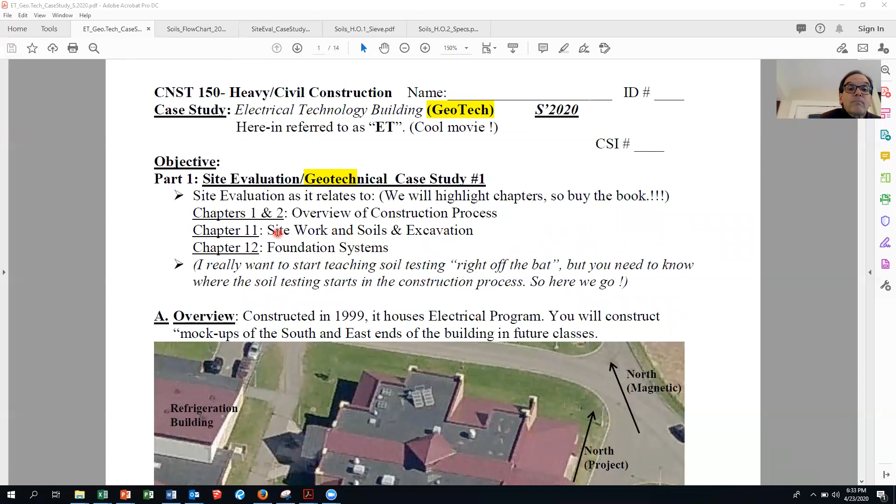And again, if you just joined us, go to Vanco Hall and go to Heavy Civil, go to the Soils Info folder, and go to ET Geotech case study. And the Mehta book, the textbook, does a nice job in chapters 11 and 12 on site work and soils and excavation, because that's what we're talking about.

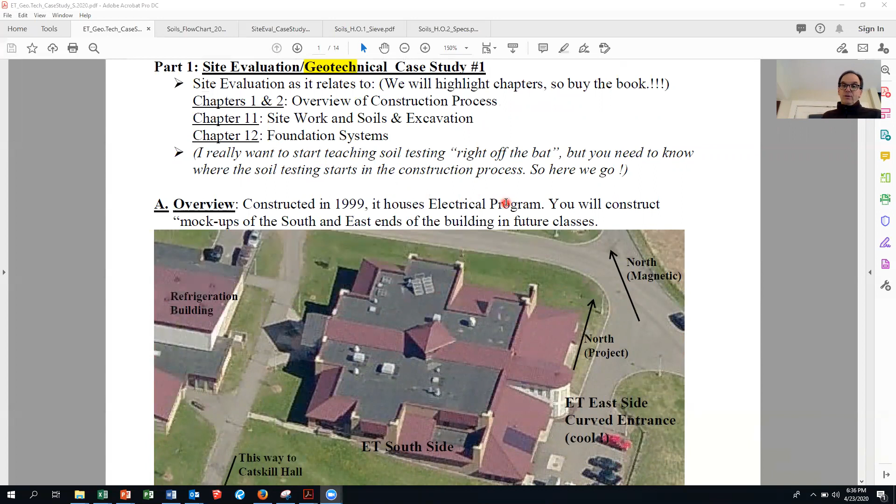There's the ET. And so usually I always like to start teaching soil testing right off the bat, but we've got to go through a little bit of background information as to where the soil testing starts in the process. And they talk a little bit about that in chapters 1 and 2. We'll talk about the pages that you want to look at there. There's ET. Everybody knows it. You've built it. It's a pretty cool building.

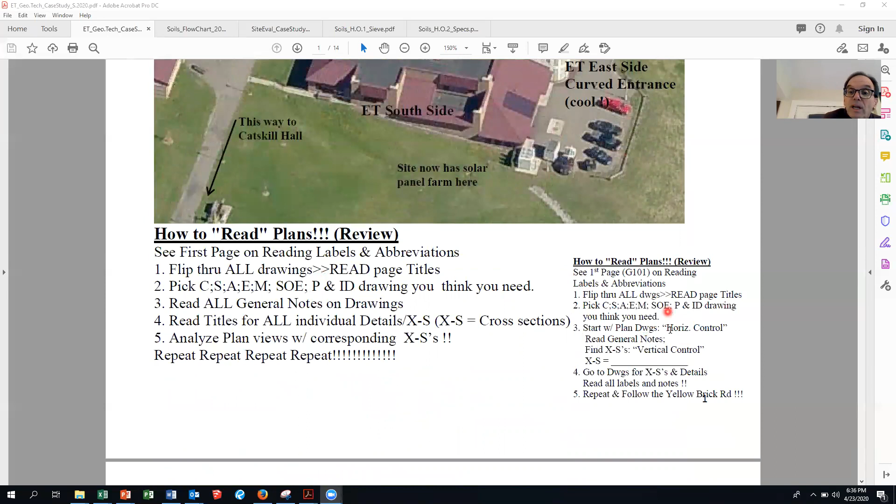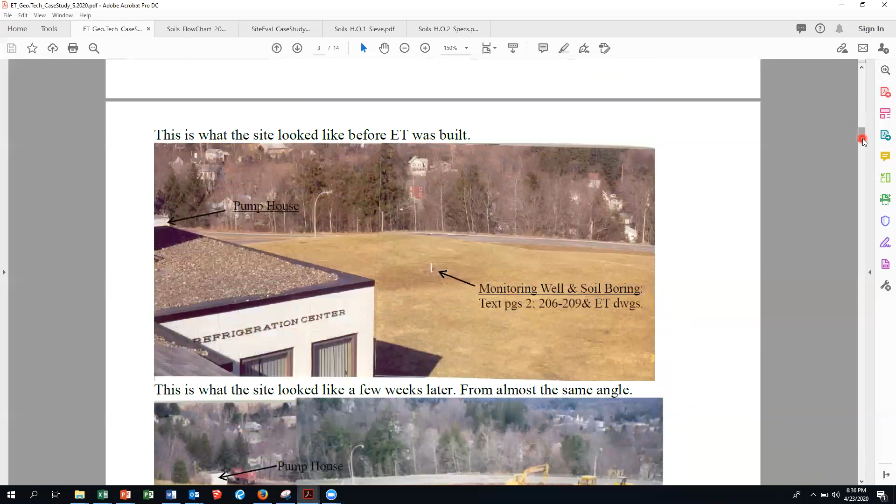How to read the plans, we went over that. This is actually an update I just saw earlier, so I figured I'd throw that on there. All of these you've already done, so nothing is, let me get this out of the way. Do me a favor and let me know if somebody is trying to get into the class, okay?

So these are all just how to read the drawings. Again, this is very similar. It's identical to what you saw in surveying. But now instead of the surveying, the layout aspect, we're going to take a look at the soils, the soils testing that was done before ET was built. So this is what that area looked like.

There's the refrigeration center before they got a new facelift. Used to be just a concrete block, and then they used that commercial stucco, and the brand name is called Dryvit. And that's what it looks like now. This is what it looked like before. So basically just a field out there, and they put in a monitoring well and soil boring. I got to fix those text pages. Those are wrong. It is page 242. This is text page 242.

And on page 2 of the text, they do talk about a surface investigation and a subsurface investigation. You have one entire course on surface investigation. What course is that? It's surveying, right? A survey is a surface investigation. A subsurface is what's underneath ground level, okay?

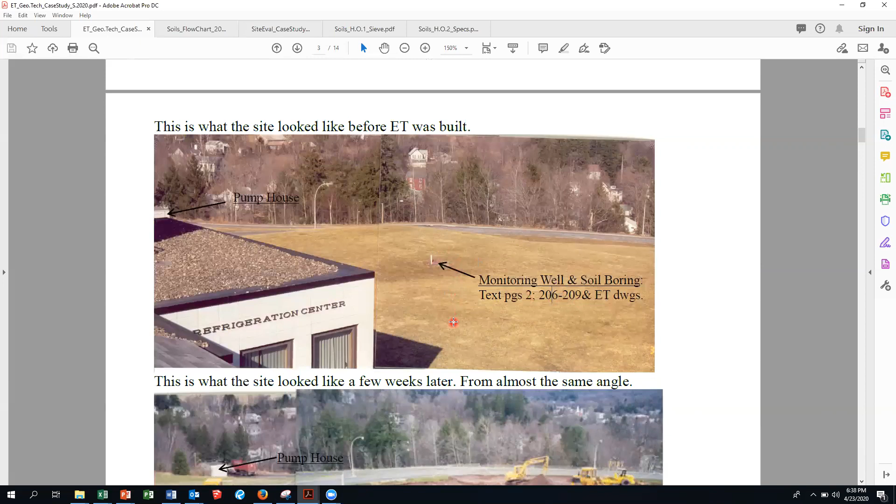And this is what it looked like a few weeks later, almost from the same angle. So they basically carved out a huge shelf. They carved this out, and this is the subgrade for the bottom floor, which would be all the laboratories of the ET building.

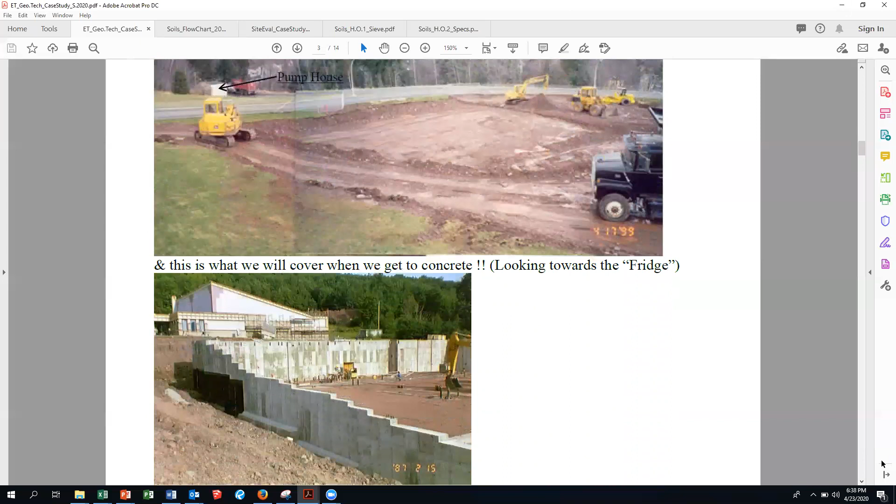And this is what we'll be covering in concrete. I can't wait to get you back to pour that damn concrete so we can get building in the fall, looking towards the refrigeration building. Here's actually where you can see the facelift going on for the refrigeration building. That was the same time, construction was during the same time.

So how did the project start? Okay, we talked about reading the textbook, the figures. This means paragraph, this little symbol right here. On page 2, they talk about 5 project delivery phases: pre-design, design, construction, commissioning, and startup. You're not going to see any test questions on that in this course, but you'll see it in the fall in commercial construction. Now on page 237 of chapter 11, there they talk about the subsurface investigation.

So here's some reading that I want you to do, 238 to 242. If you don't have the book, I'm going to be giving you enough handouts that you'll be able to take the exam for soils, which is going to be during the week of May 11th. I'm thinking that our surveying final, which is actually surveying test number 2, will be Monday night, the 11th. And why don't we do this Thursday night, the 14th? Gives you some time in between. Think about that. If that does not work, I'm writing myself a note, we've got a couple of weeks to adjust that, okay? It's going slow, but it's going fast.

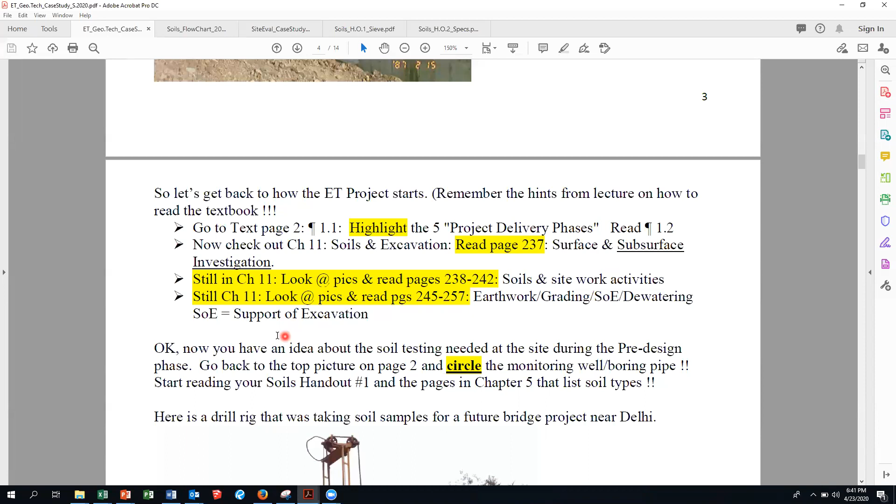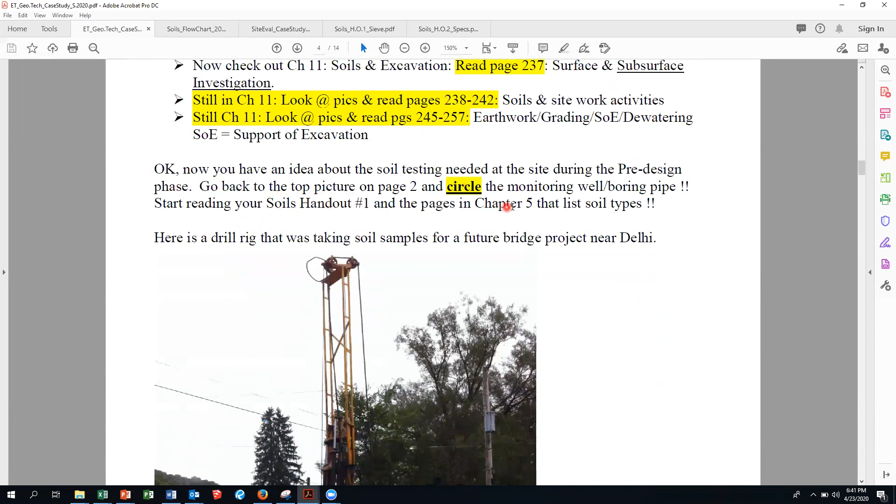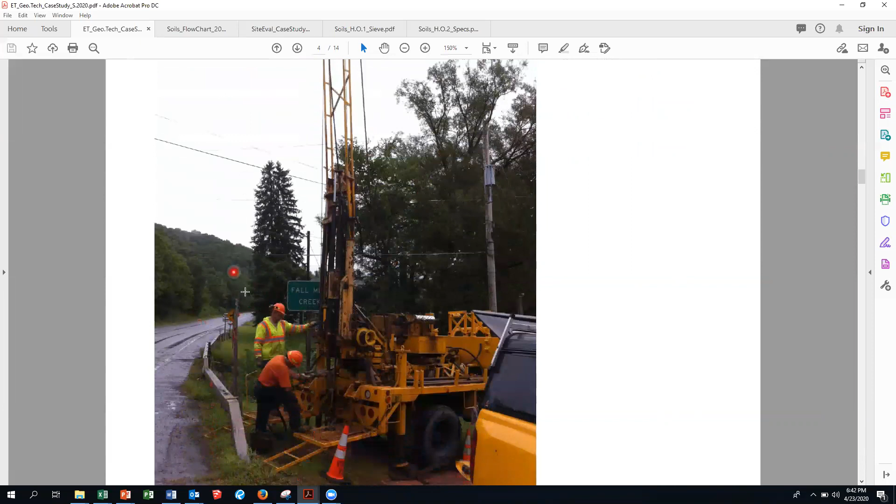Okay, so now you got an idea about the soil testing done at the pre-design phase. And let's see, go back to the top and circle the monitoring well. Well, this is if you were here at Delhi Tech. We're going to talk about soils handout number 1. And I got to change that chapter. So this is what I want to show you. This is a drill rig that was taking soil samples for a future bridge project near Delhi. And this is out actually by Falls Mills, where that pull-off is, and all the fraternities paint those rocks. That's just a little bit past this little bridge over a brook. And so I stopped by, and they let me take pictures.

So to do those soil investigations, the borings and the monitoring well, they're going to get a drill rig like this. And they basically drill into Mother Earth or Father Earth, and they take samples to a depth that the geotechnical engineer, which is a specialty of civil engineering, says: I want soil borings down to 40 or 50 feet. When we went down to the JFK expansion years ago, they were going down hundreds of feet. And so they grab,

let's see, I got to admit somebody.

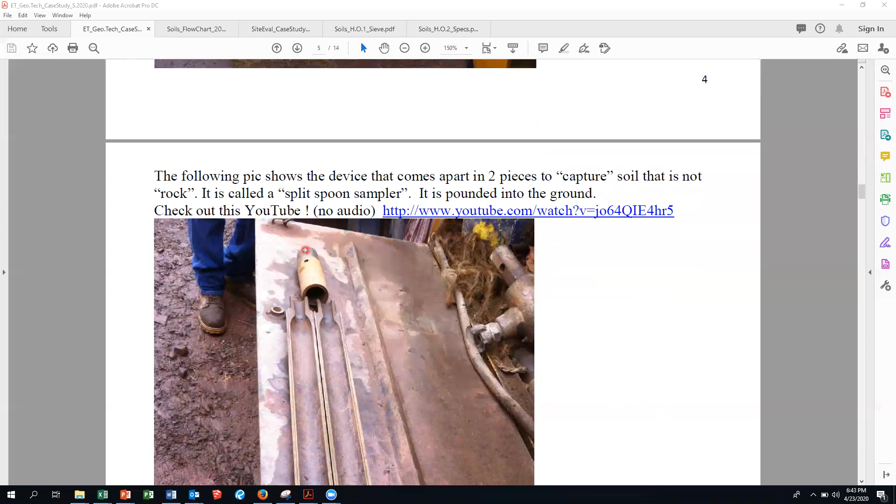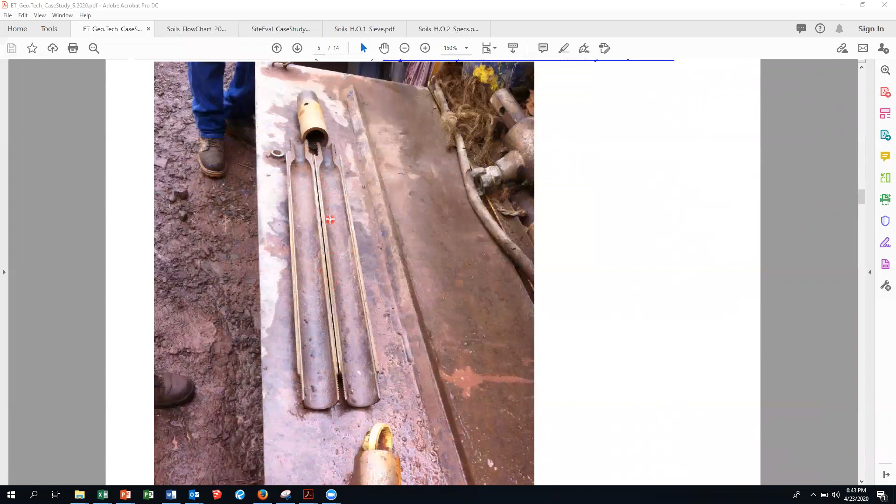So they grab these samples, and you can see this drill rig is quite high. And this shows the device that comes apart in two pieces to capture the soil that is not rock. It's called a split spoon sampler, and it's basically pounded into the ground. And here's a YouTube with no audio showing how they do that. So this is augered into the ground. It's actually within a drill. And then the samples are put in containers to prevent evaporation because they want to know the moisture content.

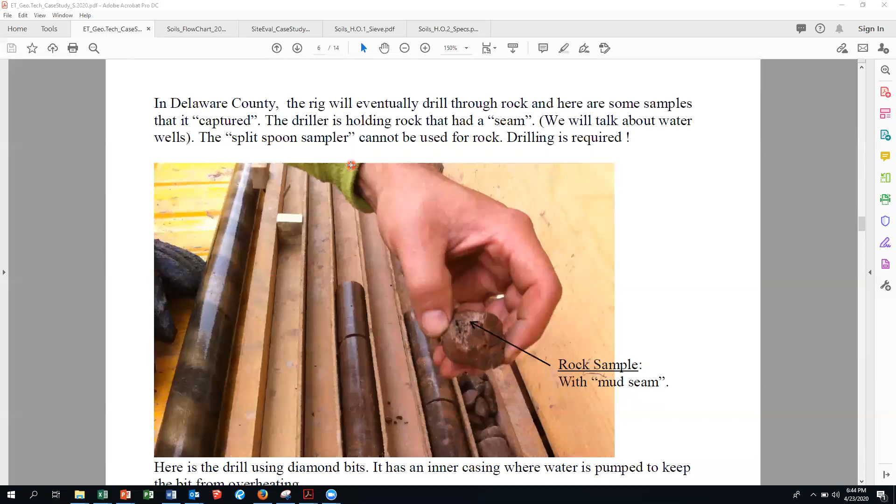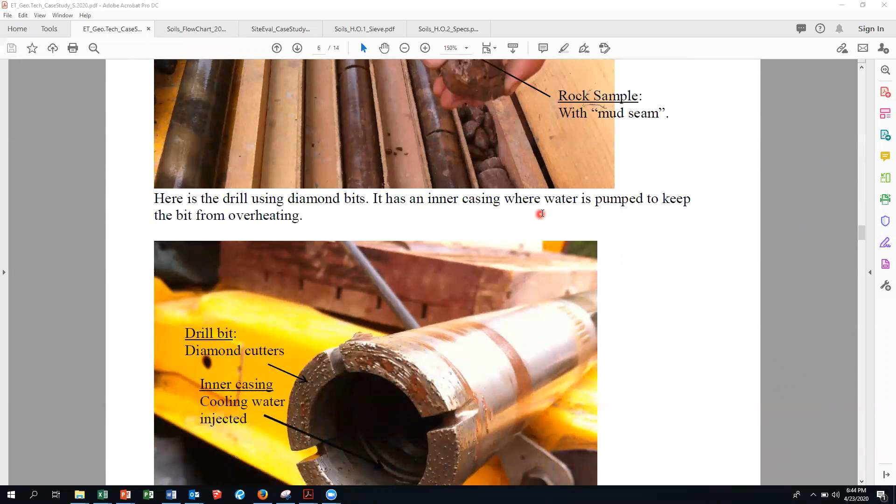Okay, and then here's in Delaware County, the rig will eventually drill through rock, and here are some samples that it captured. The driller's holding rock that had a seam. The split spoon sampler cannot be used for rock. Drilling is required. So here are the samples of rock that came out of that boring out by Falls Mills. And then here's a drill using diamond bits. It has an inner casing where the water is pumped to keep the bit from overheating. So the inner casing, this is what's getting you the rock, if you will.

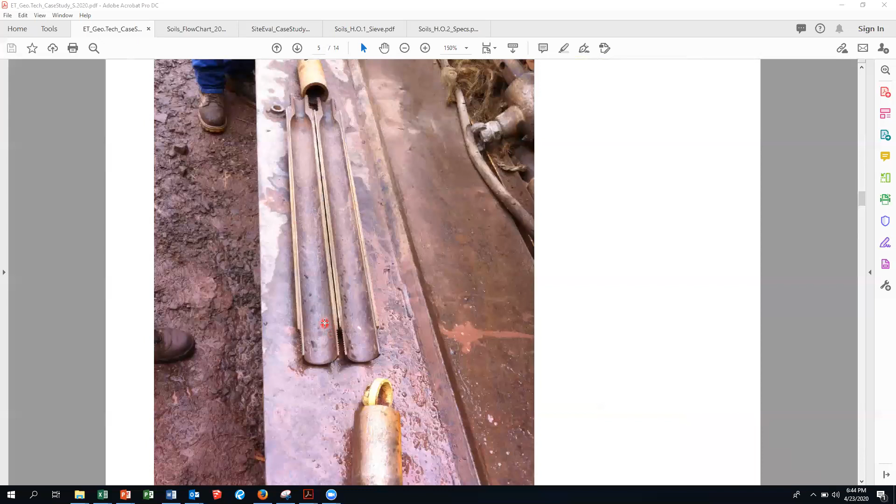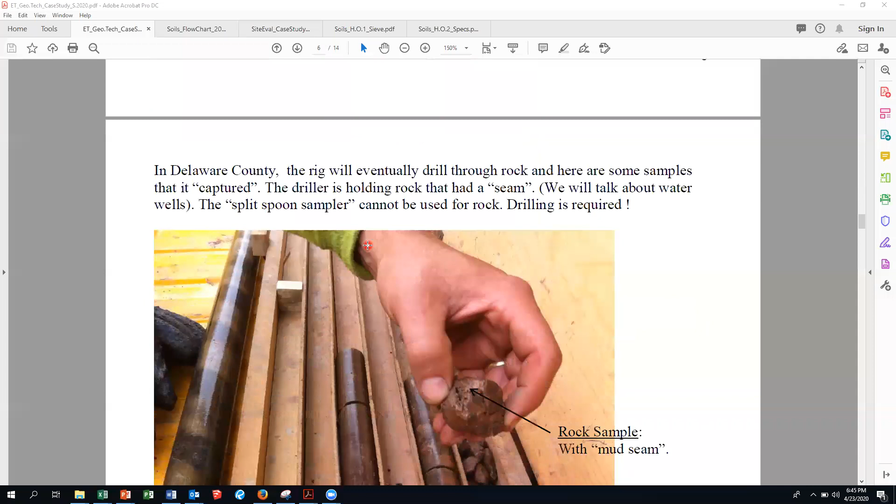So the split spoon sampler is pounded into the ground, and then they'll grab samples at various elevations, depths below surface. They'll get a surface elevation, then they'll get depth below surface, so they could actually get the elevation at any point below ground. So all of this soil goes back to the geotech, and they create something called a boring log. Okay? So figure 11.5 on page 242 of the text and page 9 of this handout.

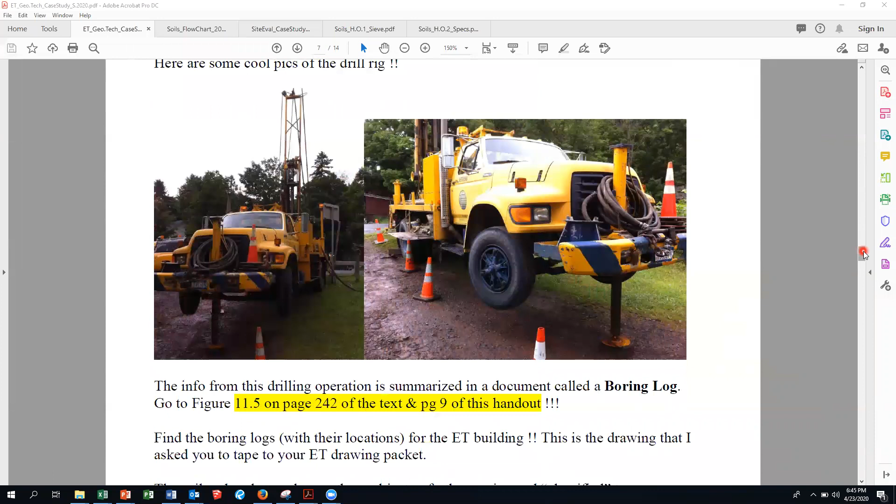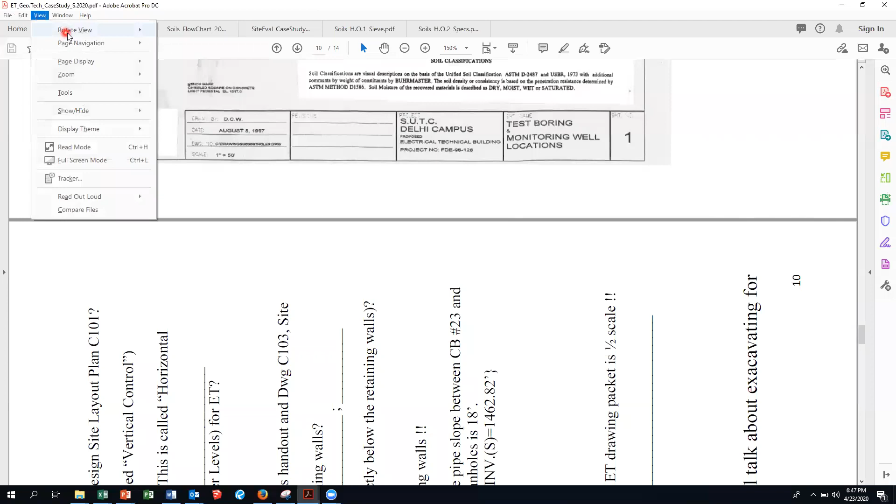So let's go back to right here, the monitoring well is near test boring, right? We already said it was TB1. So these questions are going to be, let's see, B7. I've got to update this, but they're going to be due, I was thinking, Tuesday night at midnight, at 11:59. Just this page right here, and I'll write this on.

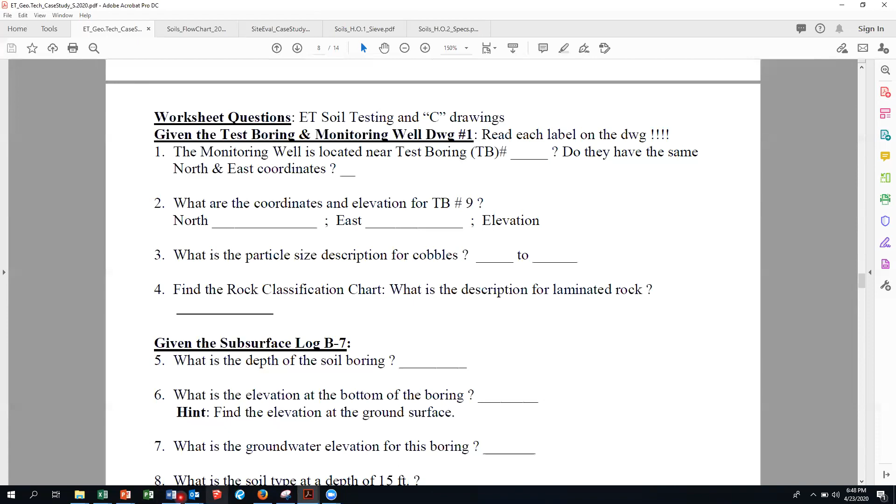So I'm going to get you log boring B7. If not, I'm going to use chapter 11. I'm going to use this. This is out of the textbook. Come on, get out of there. So this is a typical boring log that's in the textbook. Okay, so this is surface, right? So this is 0. You're going to go 5, 10, 15, 20, 25, and so on. We'll get into all these symbols.

Excuse me, Mr. McKeegan. Yeah. Bianca's in the waiting room. Thank you.

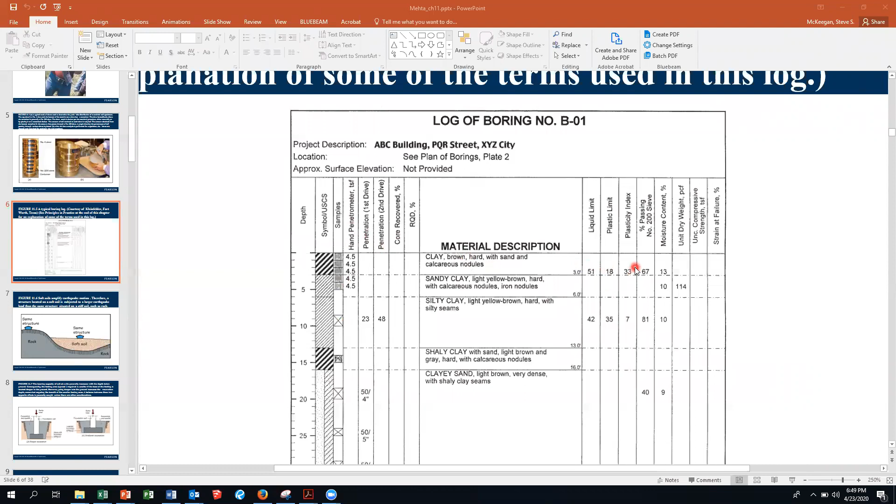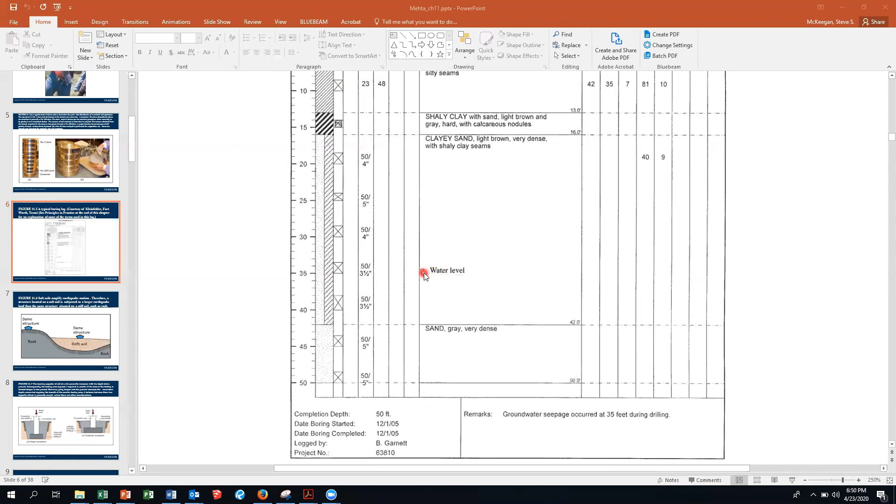Appreciate it. So here's where the samples were taken. We'll talk about the penetrometer, the penetration, core recovered, liquid limit, plastic limit. All of this we're going to go over in depth in the next 2 to 3 weeks. So you basically can say what kind of soil you have from ground level all the way down to the end; they went 50 feet down. And then there's your water level. That's where they hit what they call a static level. So that was at about 35 feet of depth. Okay. So that's a soil boring.

So what you're going to have are a series of questions on those. And again, I thought I had B7 on there. If I can't find it, then I'll rework these questions to correspond to this soil boring. Okay. And I'll have that due Tuesday night. So you can look it over after your surveying test, come up with any questions, and then we can go over that Tuesday night.

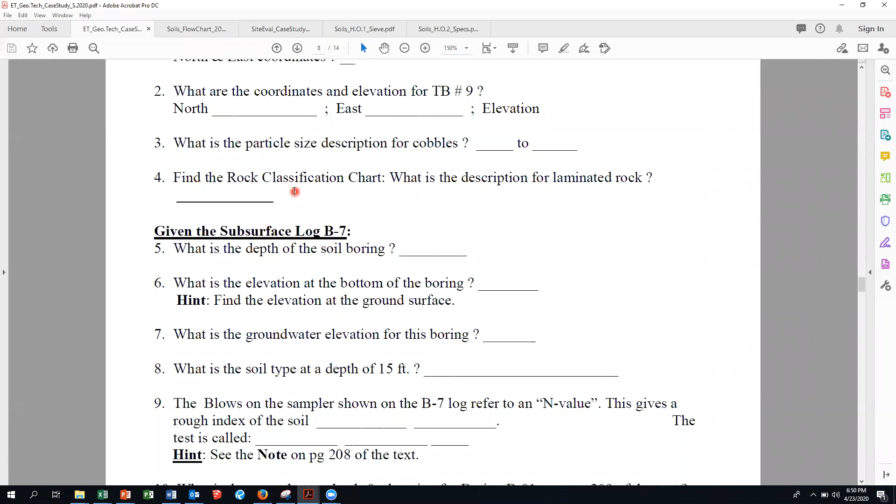You can submit that. And then you're going to have another soils homework due probably Wednesday night, or could be Thursday morning. But we'll talk about that. So let's see here. So here's coordinates, particle size for cobbles. We'll talk about this Tuesday night. Now, the blows on a sampler, it's what they call the N value, okay? And that gives a rough index of the soil density and strength. So number 9, the answer is density and strength.

And the text got a little wacky here, but the test is called the standard penetration test. So the rough index of the soil density and strength, because what the geotech engineers want to know is how strong is the soil. Now you've seen examples of what they call a deep foundation for heavy civil. What was the type of deep foundation that you saw? We didn't talk about it that much. It was right before we left. And it was those pile foundations. So that meant that the soil couldn't handle the load of that building near Boston.

A typical house, the house that I'm in, 10-inch wide wall, 20-inch wide footing, more than enough for the loads that this house is going to exert on Mother Earth. But if the soil is weak, then you're going to possibly go to what they call those deep foundations, piles, caissons, spread footings, and so on. So again, that N value is a rough index of the soil density and strength, and it's called the standard penetration test. Okay.

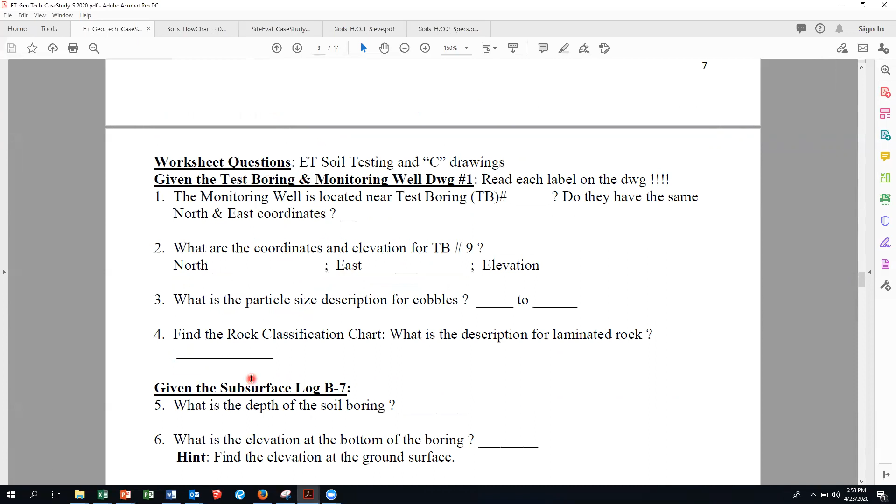And again, this is work that's done in the design phases. The designer hires the geotech almost like a subcontractor. The designer will hire a civil engineer, a structural engineer, a mechanical engineer, and so on. So as part of that, the civil engineer would then potentially hire a geotechnical engineer. And then this is all you've seen in surveying, so we're not going to go through that.

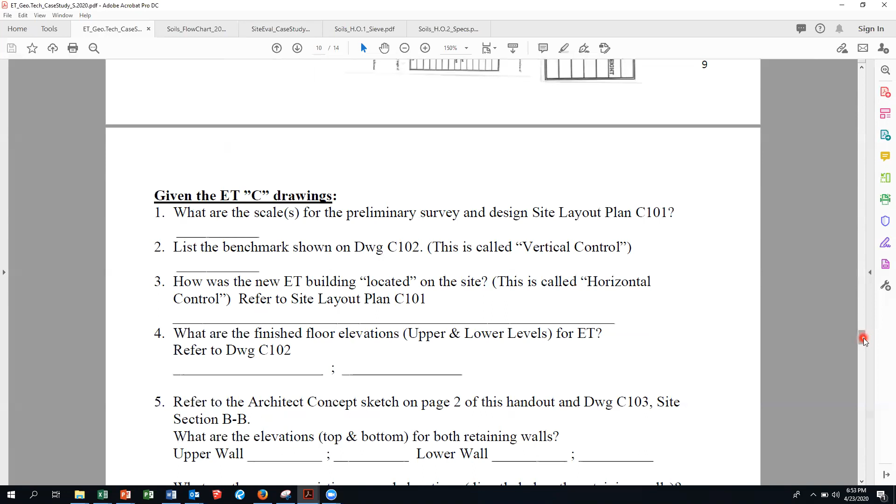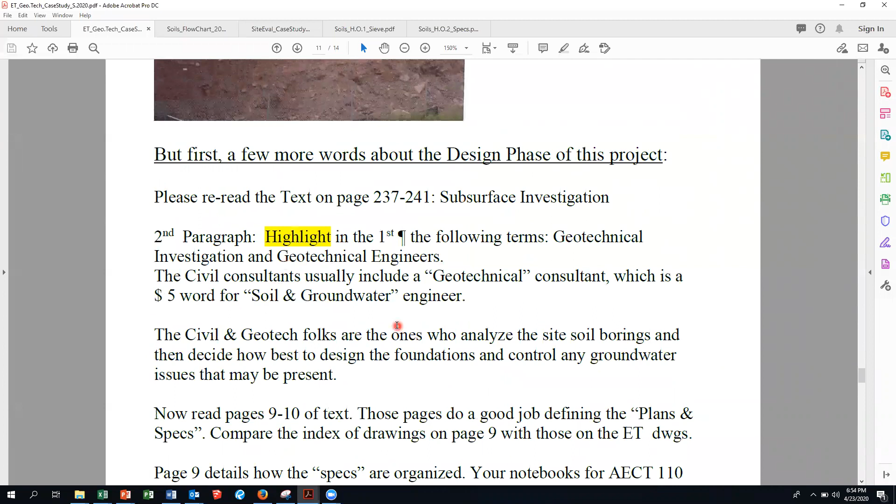There's a picture of those retaining walls for ET. This one is buried, and this one they tore out. Okay. And again, this is on page, what the hell page is that? Page 11. Okay, we talk more about the subsurface. They talk about plans and specs. Right, you've already seen that. The soil data is part of Division 2.

Remember the MasterFormat. What was the division for masonry? The index. What was the index number for masonry? How about concrete? Ooh, you might want to know that. Concrete was 3, masonry was 4, right? You might want to check that out for tomorrow night, but that's just me. That would be a hint. So they generated a new index about 4 or 5 years ago. Division 2 used to be soils. Now Division 2 is existing conditions. And Division 31 is excavation. Okay.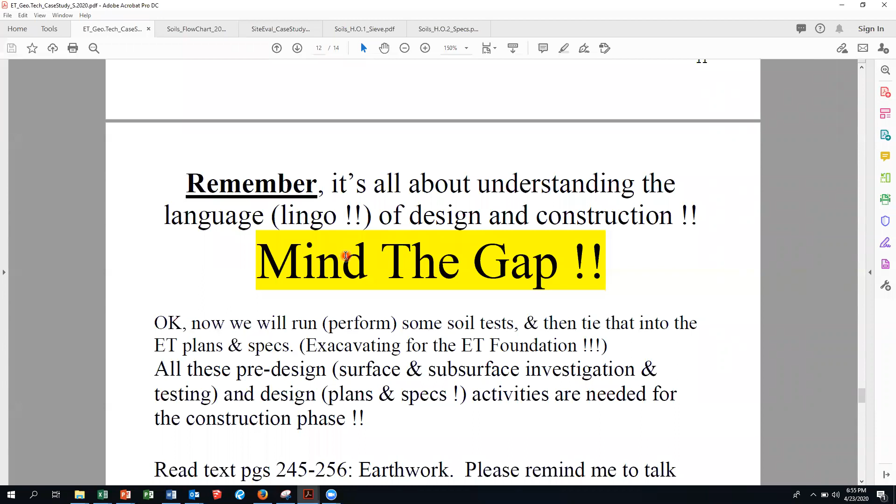And then it's all about the language. Mind the gap, that was always a fun thing I could tell you about. If you're taking the subway in London, as you get out, they say it so nicely. They say, mind the gap. In Brooklyn, they'll say, watch the beep, beep gap, the crack between the car and the subway platform. So it's all about language.

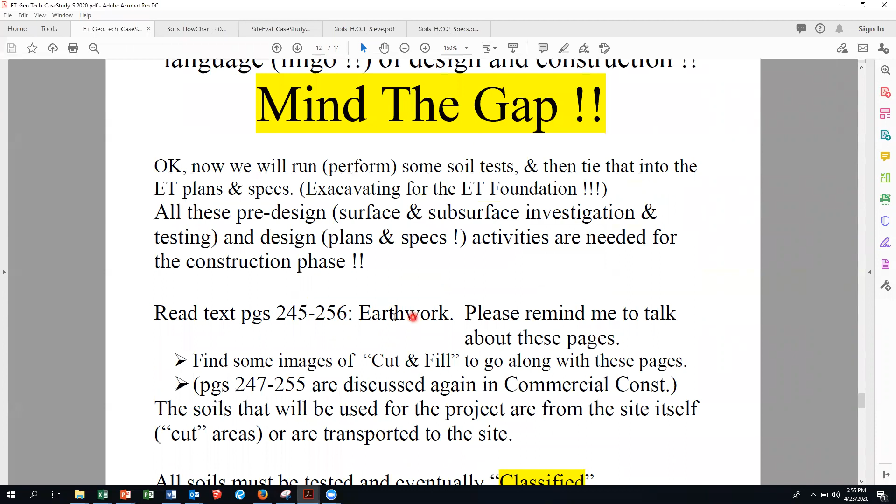Okay. So now we're going to talk about the soil tests that are run on those samples. And then that helps the geotech come up with a foundation design. Okay. And then we talked about the reading on earthwork. But here, the soil that we tested, not just in design stages, but in the construction stage, has to be classified. This is critical. This is on page 12. This is a big part of your test during the week of May 11th. Again, everything we're going over tonight is not on the test tomorrow night. Tomorrow night is just masonry. Okay.

So why do we classify the soils? We've already answered it. We determine if the soils can be used for the specific project. So let's say you're building a pond for somebody in the Delaware County area, and all your soil is gravel, right? No way. Thing's going to leak like a sieve. Let's say you're building a road and you hit into a bunch of clay. Well, that's not good for a road. So that's why you classify the soils, to determine if we can use it for that specific project. And the specs will tell us.

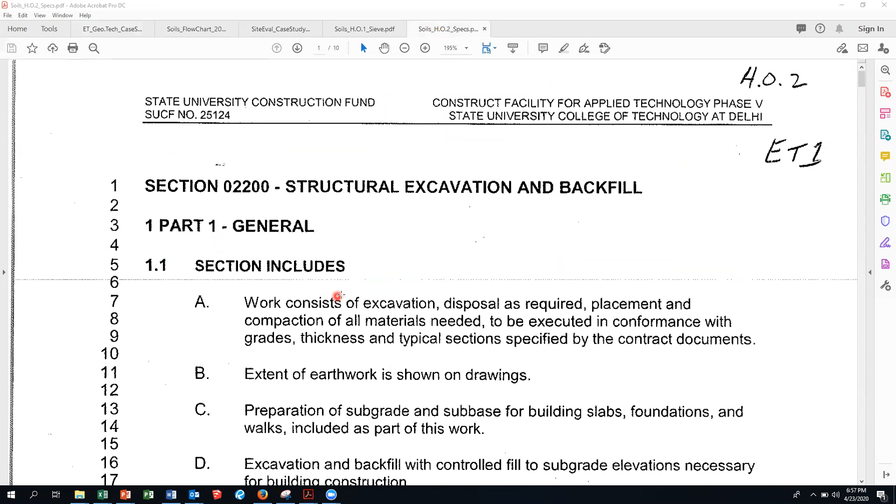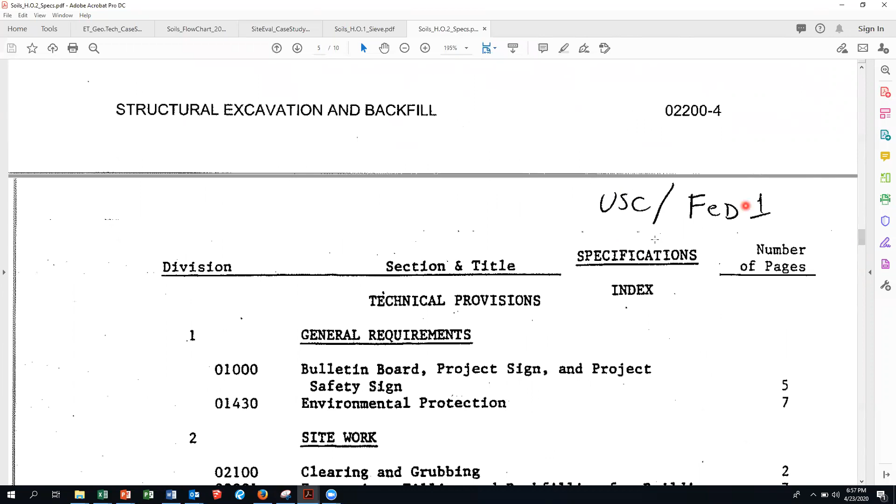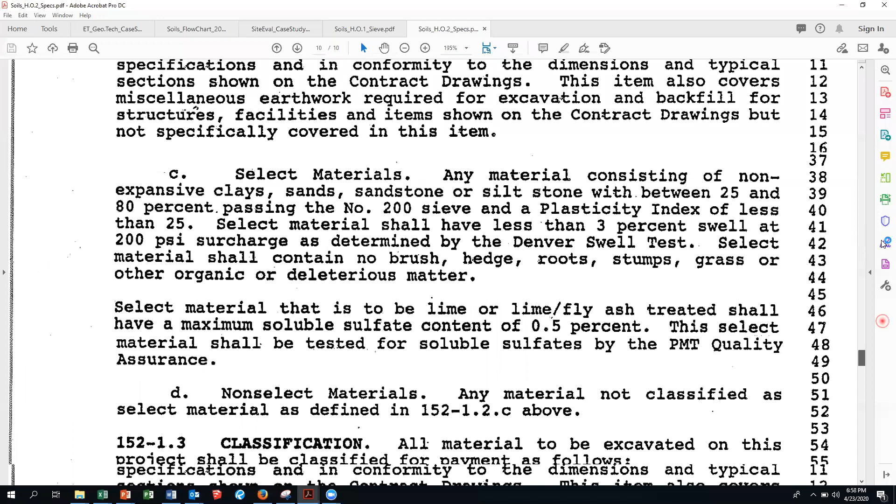There, you'll see up here, it says, these are the specifications for the ET project. Okay, so you got ET, and then you've got some federal specs. And this is dry stuff. Oh my God. But is it important? Then you got DIA, for Denver International Airport, or do it again. Went from a $1.9 billion project to a $5 billion, a slight cost overrun. So there's some specs from Denver. And then I think I threw in some, no, I didn't. I've got it on another handout. We've got some New York State specs. So we'll get into that.

So again, why we classify: determine if we can use it. And then the second answer is, how can the soil deal with the loads? Is it a building, road, bridge, tunnel, etc.? The tunnel that's going under the Hudson River as we speak, which is a bypass to the Delaware Water Aqueduct, which is leaking. For that tunnel, they've hired 2 geologists full-time. They have to know the strength of that rock that they're tunneling through. So the load is critical. The drainage. How well does it drain? Again, if you're putting in a pond, you want clay. You want it to hold water. And then frost action. That's always an issue here.

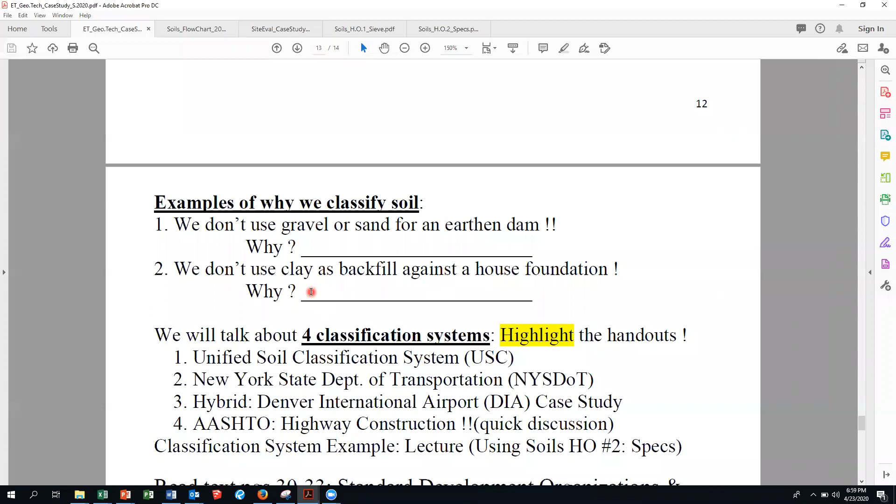Okay. So examples of why we classify soils. We don't use gravel or sand for an earthen dam. We don't use clay as backfill against a foundation, because the clay absorbs water and expands, and it'll push against that foundation. And we're going to talk about 4 classification systems. The USC, which I just showed you, it's the federal one. Federal soil classification. Unified Soil Classification, not University of Southern California.

Hey, what time is the football draft on tonight? 8 o'clock. Okay, we'll be done by 8. Actually, I could give a damn, but I'm so bored. It's like, Jesus, I got to watch something.

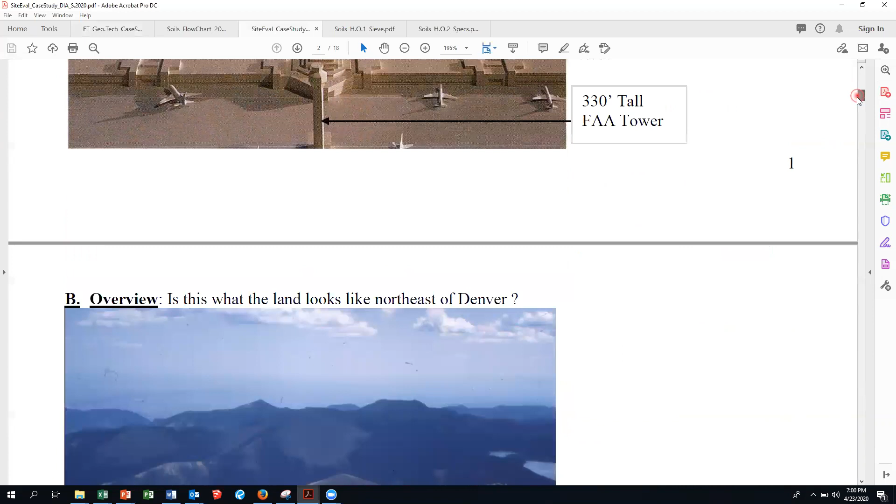Right? That's a model of the Denver airport. That's not where they put the airport. Okay. That's where they put the airport. Hey, that is the concrete graveyard. Remember I told you that they had to rip out 20,000 cubic yards of concrete. That's where a lot of it went.

Damn that phone. I turned the volume down too.

So the land northeast of Denver is this prairie where the deer and the antelope roam. And then there's one of the concourses.

Oh, I thought I had that volume down. Let me just, so resume recording.

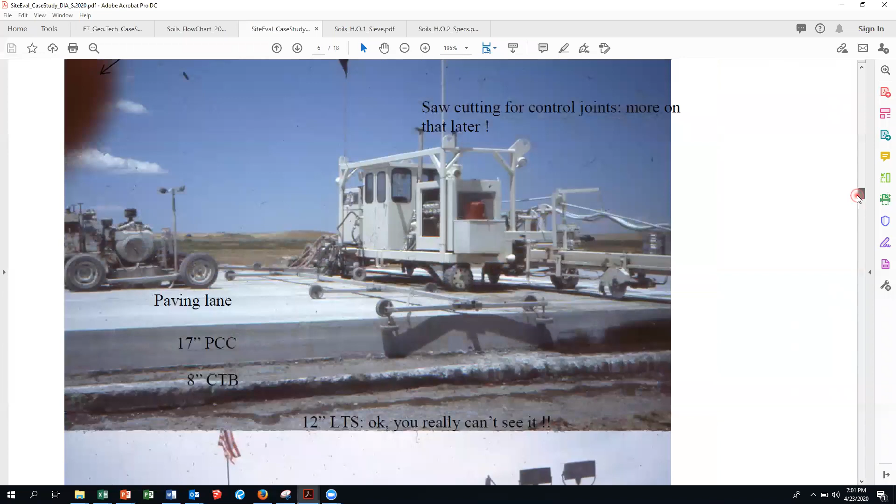So here's the concourse. That's where they park the birds. Here's the runway in the distance. So we're going to cover all of this as to how they dealt with soils. And then just some cool pictures that we'll go through. That's Royal Gorge. Just like to show that. You've seen that before. There's the paving lane of a runway, the pavers. And here's the soil specs. So we'll talk about that if we have time.

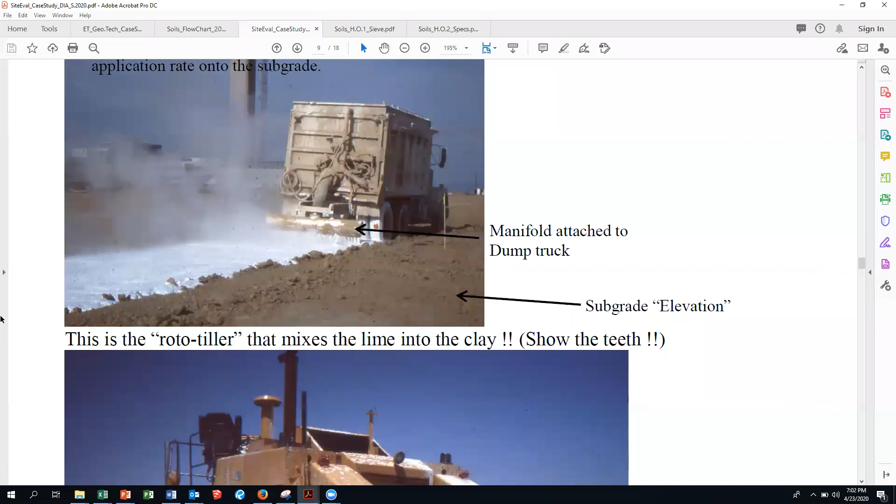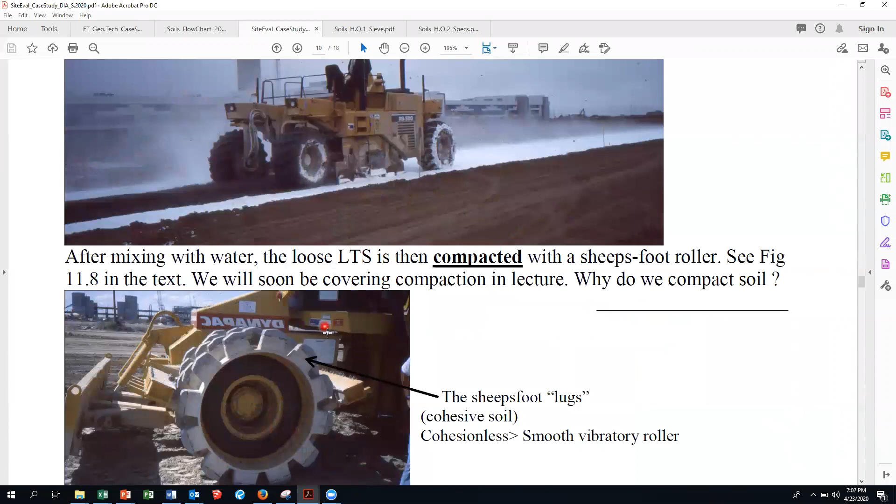And then there's the soil cement, where it's all clay. And so what they do is they lay down a blanket of a lime slurry, and then they take this $250,000 rototiller and they rototill it into the ground. That's what they're doing right there. So that takes all the plasticity out of the clay, and then they compact it with a sheep's foot roller.

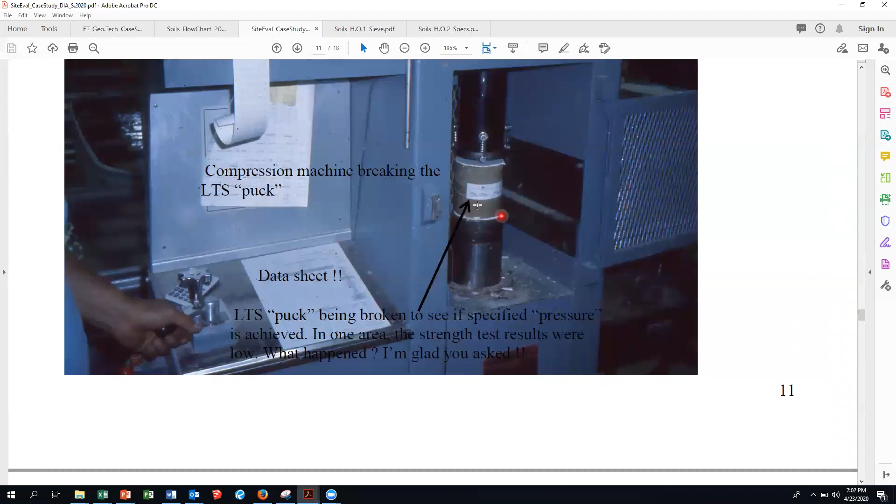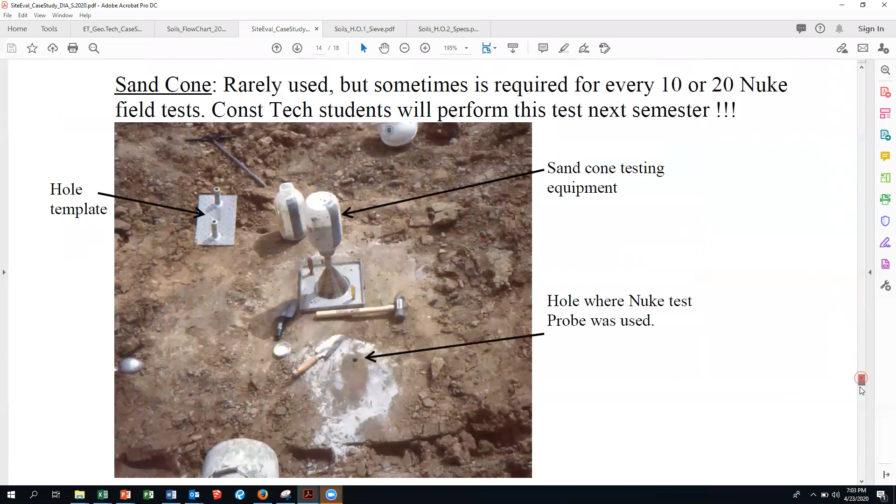And then here's some of the other tests. So that's where they actually break. They take a sample of the soil and they actually break it in compression. And then here's some of, we're going to study this in terms of the field testing for compaction. Okay, proof rolling. And then we're going to walk you step by step.

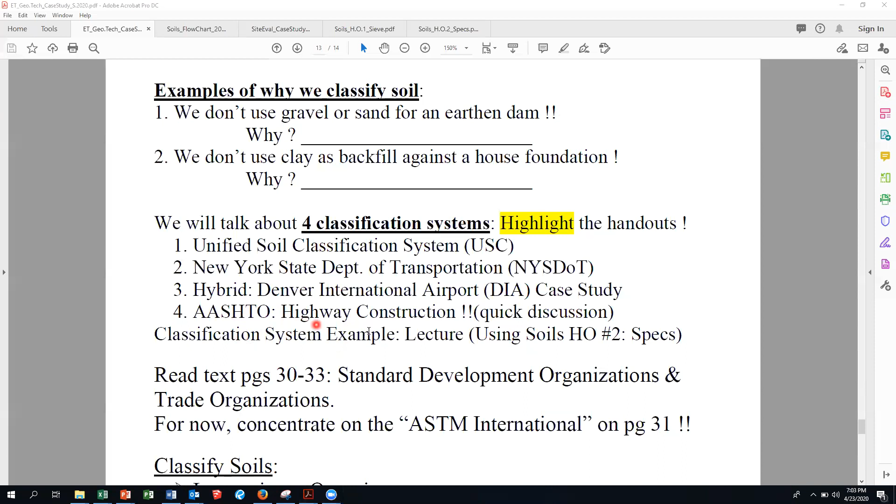Okay. Now we're going to classify soils inorganic versus organic. All of our soils are inorganic. We do not care about landscaping. That's nothing against the landscapers. They make a lot of money, but we don't deal with it. That's just the final product for the lawn.

My motto is pave it and paint it green, as you know. I don't mow my lawn until probably the first part of June. With this weather, it won't need it till July.

We're going to use a sieve test and a hydrometer test for what they call grain particle size. And then there's also a plasticity and liquid limit test. Did anybody get a chance to look at the Norwegian clay slide? That was a marine clay. That's one of the YouTubes that I asked you to look at. Okay, so these are all engineering properties that we're going to talk about. And then here's some cool soil pics that we've seen through the years.

This is on one of our Washington, D.C. trips. This is called a surcharge. They actually will build up soil in this area, which is equivalent about to the load of the future building. And so that will compress or consolidate the soil at the site. It isn't done a lot, but it's done some. And then they take it away, and then they build their structure. So they don't get any what they call long-term consolidation or long-term settlement of the existing soil at the site.

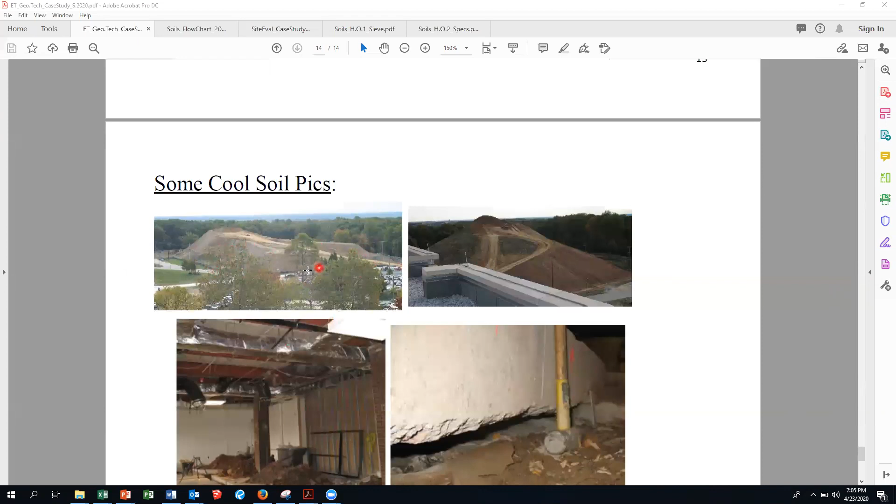And this is an interesting one. These are pictures from Mack Hall. Now, when you come out of Mack Hall, you've just eaten at Mack Hall, and God, do I miss $5 Fridays. So you come out of there and you're walking towards, say, the library. On your left is the baking lab. You've probably seen it. This is when they were rehabbing that room. I forgot what it was, and they made the baking lab out of it.

Well, they did some coring through these slabs. Look at the gaps underneath the slabs. So they were putting piping in for floor drains for their sinks. And when they did that, they found all these gaps. In other words, the soil had consolidated. It had settled underneath that slab.

And so what they did is they pumped grout after they put their piping in, right? They saw cut the slabs, put their piping in, backfilled the piping, and then concreted in here, and then drilled holes and put in almost like a slurry grout to fill these voids. So that really showed consolidation, or what they call long-term settlement.

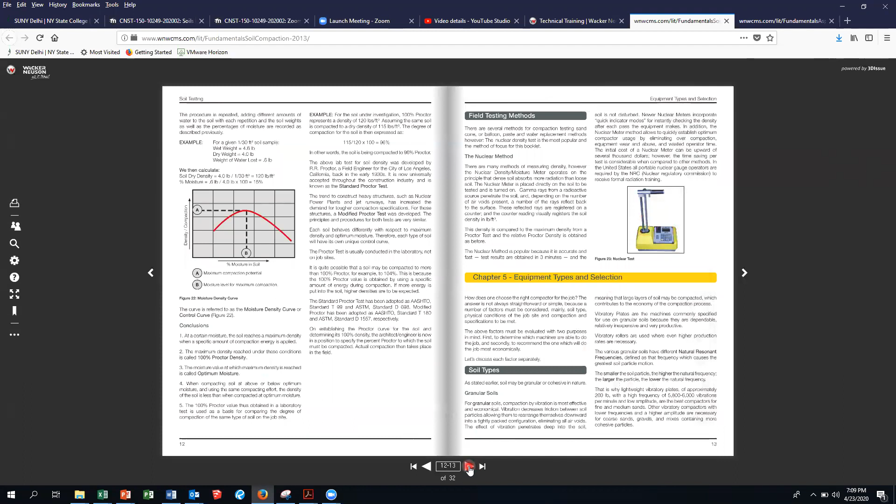And then the lab test for compaction is called the Proctor test. And then the field test uses the nuclear gauge or the old Roman sand cone, which I don't even think they show. They don't. But they do talk about the Roman roads. Okay.

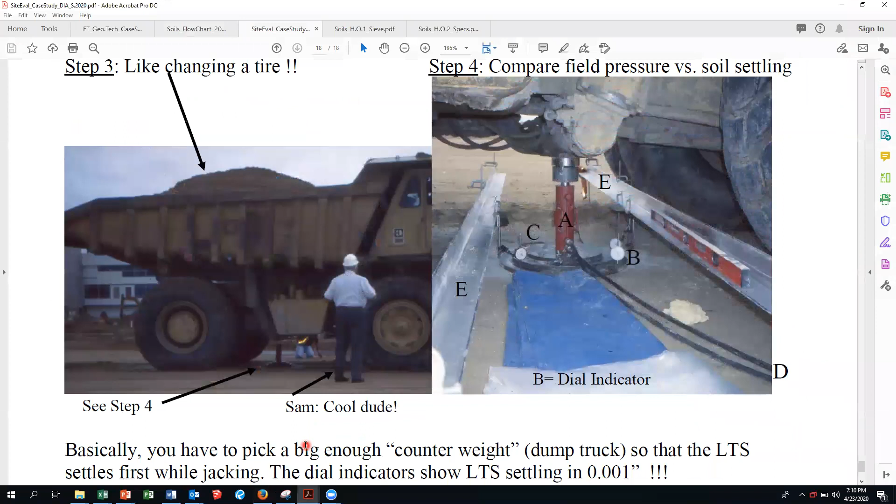So if we go back to my PDFs. So here's a good flow chart. You have this. This is also on Vanco, the soils flow chart right there, which is in the soils folder at the top of the Vanco hall. Whoops. Soil flow chart. Here we go. So this is kind of a synopsis of what we just talked about. Surface

exploration, the survey. This is the GPS that our friend Kevin, who's a professional surveyor locally, comes and shows us. We'll bring him back a year from now, and you folks will be welcome to come and take a look at all the toys he uses for surveying. This is his robotic total station. So this thing is like R2-D2. It pivots on that tripod, and basically Kevin walks around with a, this is the GPS rover, but he walks around with a prism pole, and that thing follows him. So it's just a one-man crew.

So then we talked about subsurface exploration, the soil borings. That's from what we just said and what we just saw in that other handout. This is the flow chart. So the soil lab testing on the site borings and soil trucked to the site. In other words, if you have to bring soil on site, you go to a gravel bank, and it's what we call engineered or screened soil. You have to test it to make sure that it's appropriate for the project. So if you're doing a road, you want a nice clean gravel.

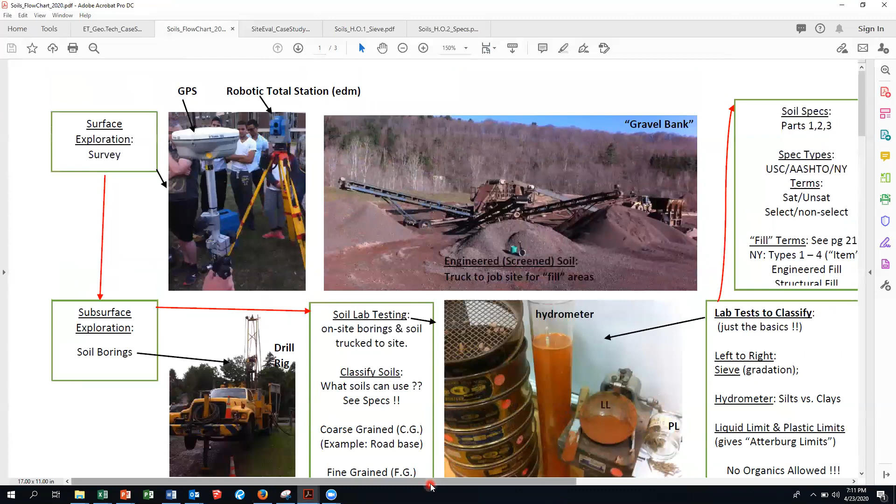Again, we classify soils. What soils can we use? We got to go to the specs. And we break down soils into coarse-grained and what we call fine-grained soils. We're going to talk about that in a minute. Okay. So here are the lab tests to classify. This is a stack of sieves or a nest of sieves, and it tells the grain size of the soil sample. Okay, because here they're screening according to sizes, but they're not all the same size. Some are very close, and that's what's known as a uniform gravel or a uniform sand.

The hydrometer is for the fine-grained soils. Okay, this is for the fine-grained soils. And so we go to the specs, right? Is it the USC, the AASHTO, the New York State, the feds? And we say, is the soil satisfactory or is it unsatisfactory? Or another term that's used, it was used at Denver, is it select or is it non-select?

Okay, so what I'm going to do over the weekend is generate a PowerPoint very similar to the one that I did for coordinate geometry in surveying. And it's going to be a step-by-step process on how to run the sieve test. So I'm going to ask you again to review the sieve YouTube video that is listed on Vanco, if you haven't. I think it's about a 15, 17 minute video. And then my PowerPoint will complement that. And you're going to have some sieve homework that I'll probably send you by the end of the weekend, which will probably be due late Wednesday night, maybe even into Thursday.

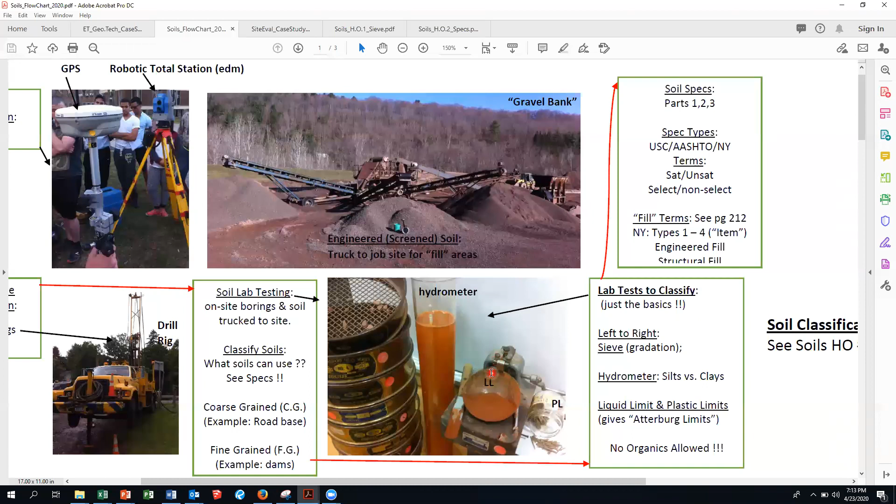I'm up to 3 million hits. I'm making money. Okay.

Again, lab tests to classify, just the basics: sieve, hydrometers for silts and clays, and liquid and plastic limits. It's called Atterberg limits. In other words, is the soil plastic like clay? I took that sample of Denver clay, wadded it up like a baseball, and then threw it against the lab wall. That's cohesive. Okay. And then soil classification, see soil handouts 1 and 2, which we're going to talk about in a minute.

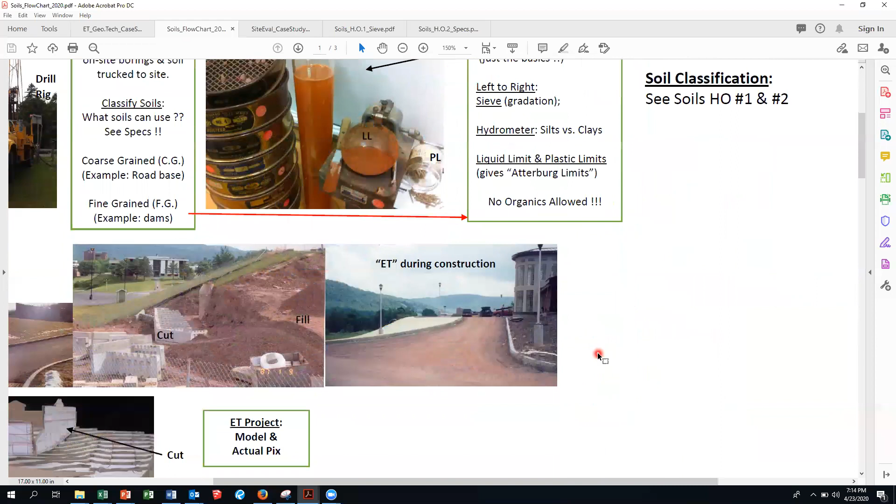Here's the existing site before ET. There's the refrigeration building. Okay, you can see how this looks similar to this. And then that's where they put in those retaining walls, and they got into a compaction issue, and that's why they had to bury one and rip out the other. There's the manhole going up. These are in sections of manholes, risers, if you will.

And so here's the fill for the roadway. They had to cut into the side bank for this retaining wall. But where the driveway is, you can see in the model, that's where they filled. And there was a little bit of fill on this corner of the building. A student made this for me, and I think I've shown that to you. And of course, on the back side of that building, it was about a 15 to 16 foot cut for that lower lab floor area.

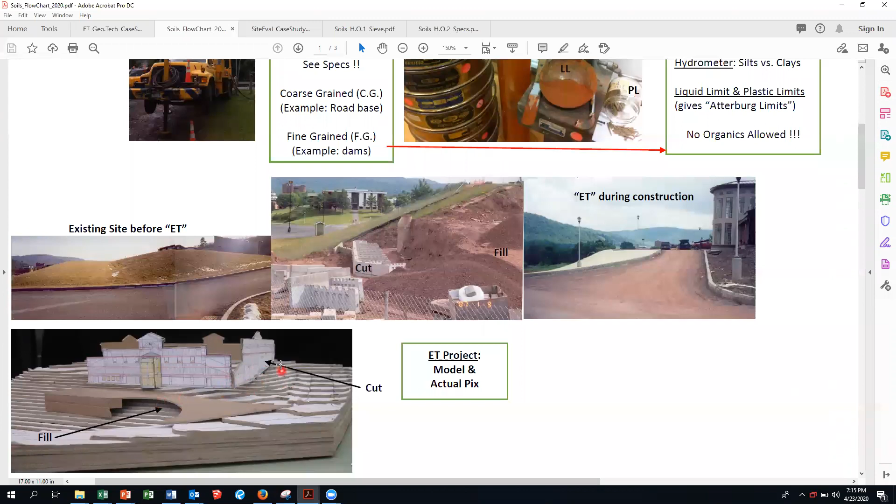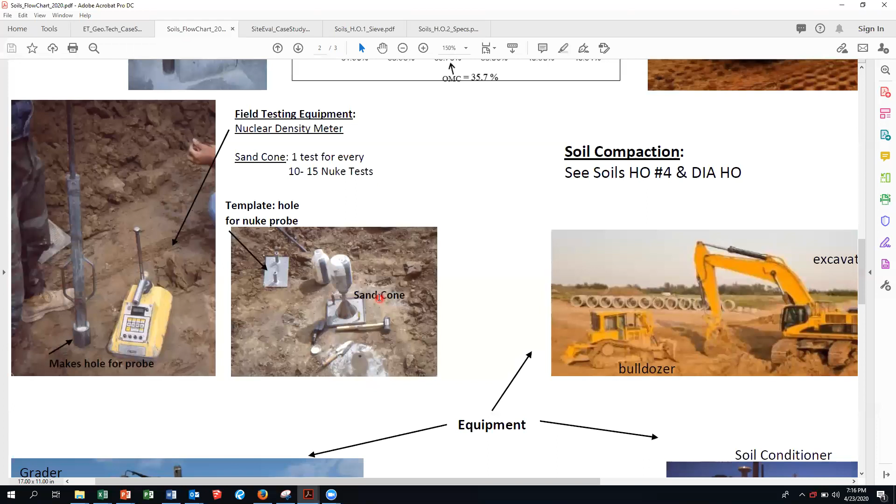Okay. And then this, again, always come back to this. This, I'll tell you, is probably going to help you the most for the soils exam in May. This is the Proctor test, the Proctor curve. There's your sheep's foot roller. There's your nuke. There's your Roman sand cone. I call it Roman because it's old and it rarely is used, if ever. And then just some equipment. Okay.

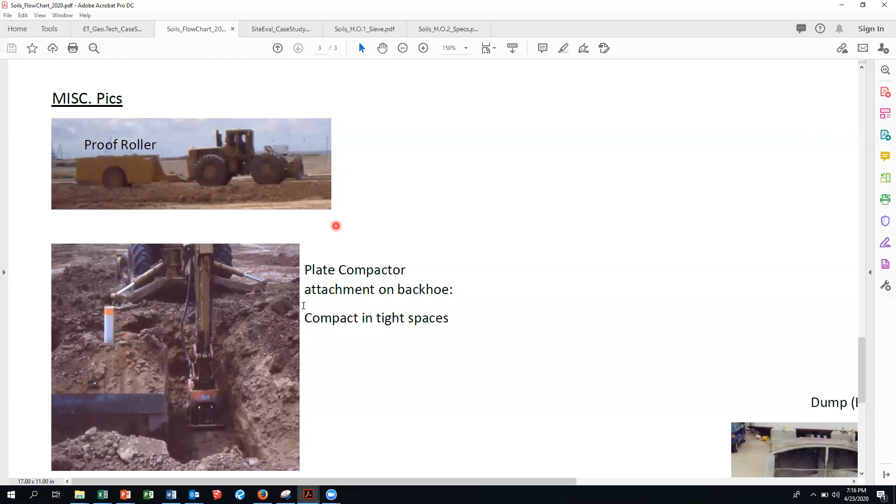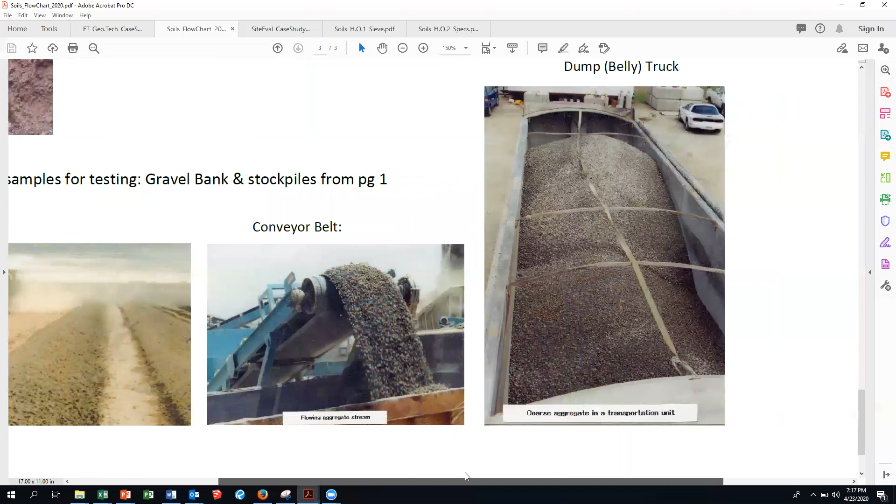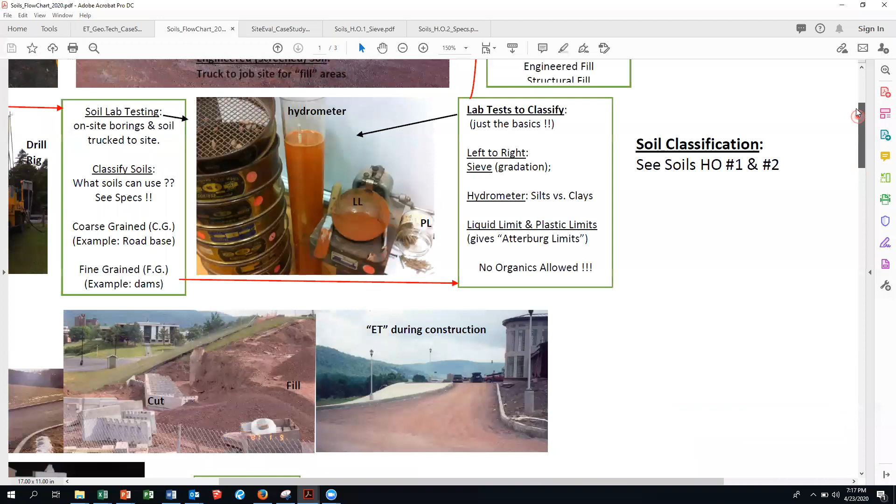Oh, and here's a proof roller. We'll talk about that. Plate compactor attached to a backhoe. You can compact in tight spaces against a manhole. Now, again, the designer took samples from the test borings. But during construction, in those fill areas, you've got to sample the soil that is used to build up an area, which could be a roadway base. You've got to sample it. It could be coming from a conveyor belt right at the gravel yard, or it could be coming from a dump truck, or what we call a belly dump. We'll talk about that. So again, use this to get a feel for where in the process we are. Okay.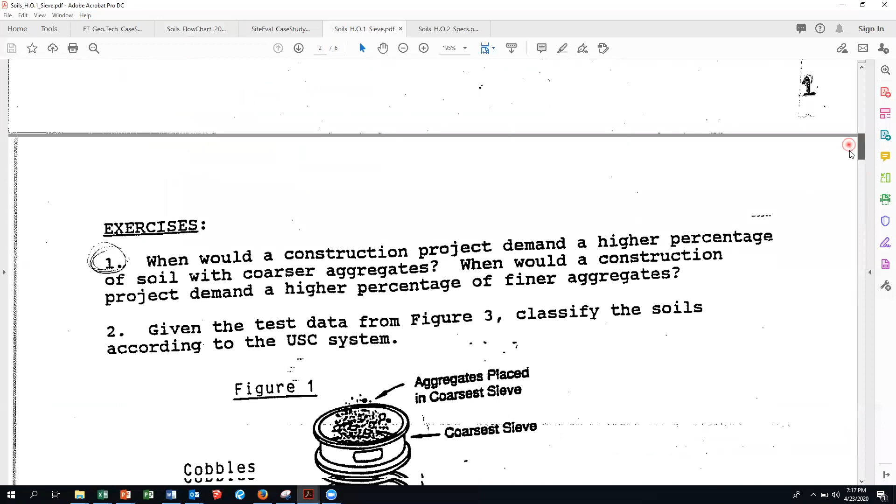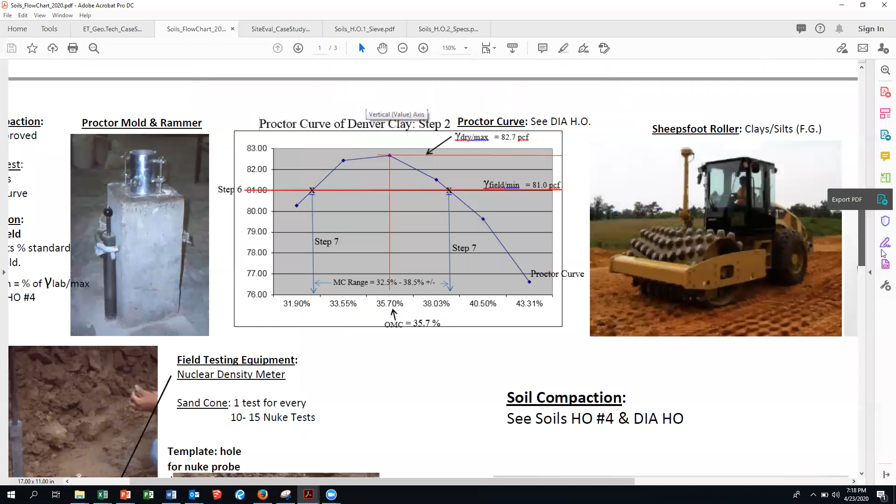So that takes us to handout number 1. And this is what I'm going to do over the weekend. Like I said, I'm going to get you a PowerPoint. And here's the breakdown of soils. See this sieve right here. If that had an opening that was 3 inches by 3 inches. In other words, you come in with a sample, 5 pounds, 10 pounds. There's a specification that says how many pounds you've got to bring in to sample. So you're bringing it in from the boring, or a dump truck comes to the site, or off the conveyor belt.

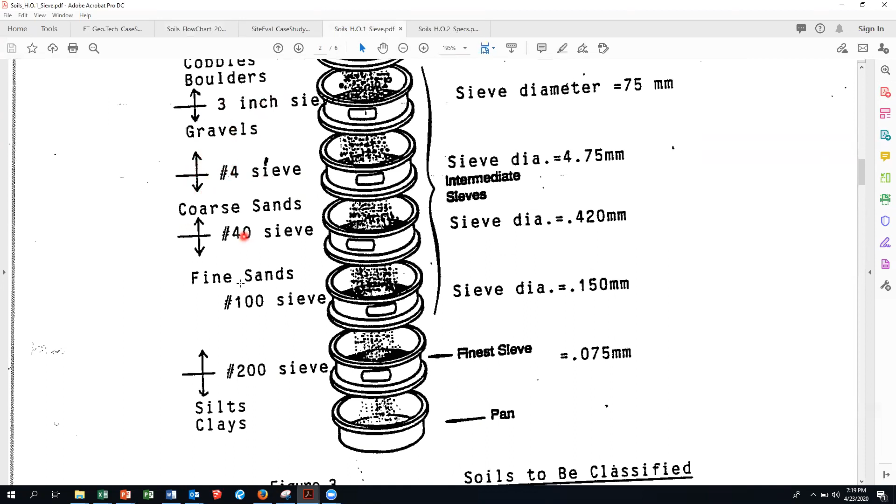If any of that soil is retained, in other words, if it doesn't go through a 3-inch sieve, then it is either a cobble or a boulder. And a boulder actually is anything that does not go through a sieve that has a 12-inch by 12-inch opening. Anything that goes through a 3-inch sieve but does not go through a number 4 sieve, not a 4-inch, a number 4 sieve, these are called gravels. See where it says 3-inch, and then the number 4, the number 40, the number 100, the number 200.

If it's a numbered sieve, see the number 4 right there? You take that number and you square it, and that is the openings per square inch of this mesh. This is called a sieve mesh, or a sieve screen. So a number 4 has 16 openings per square inch of that surface area. A number 10 has 100 openings. A number 40 has 1,600. How about a number 200? How many openings per square inch? I know I put you all to sleep. Is it 800? Well, what's 200 squared? That's a test question in May. What's 200 squared?

400? 40,000. 40,000. 400. No, that's 200 times 2. That's not 200 squared. Yeah, my bad. I was thinking too fast.

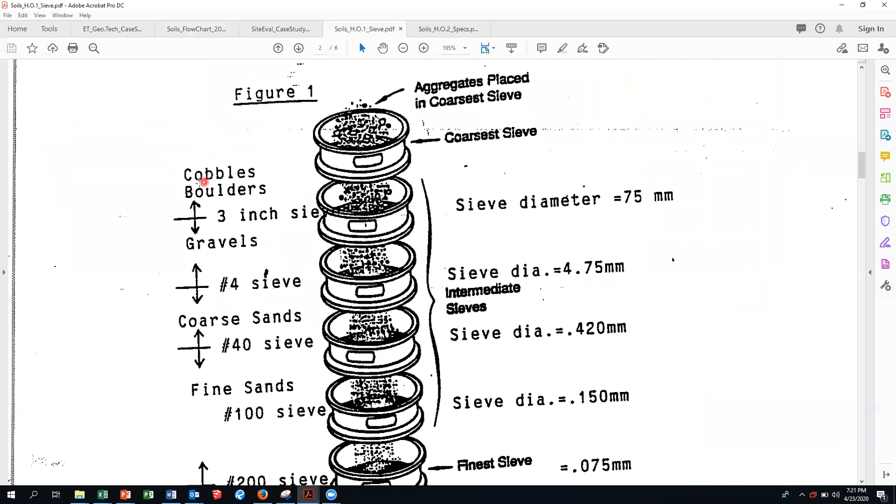So if I go back to this, again, anything that goes through a 3-inch but is retained by the number 4 is a gravel. Any particle in that sample that goes through the number 4 sieve but is what we call retained by the number 200 is a sand. And any part of the sample that goes through a number 200 is a silt or a clay. And clay is your smallest soil particle. Okay? It's your smallest soil particle.

Now, the test that differentiates a silt from clay is the hydrometer and the plastic limit and liquid limit tests. Okay, so these are done on the fine grain portion of the soil sample. If it's all gravel, they're not going to run a hydrometer test or an Atterberg test, which is liquid and plastic limit. They're just going to run the sieve test.

Right? If you have, say, less than 5% of the soil sample. Let's say you got a 100-pound sample. If only 5 pounds goes through the number 200 sieve, then that's 5%. That's what they call a clean gravel or a clean sand.

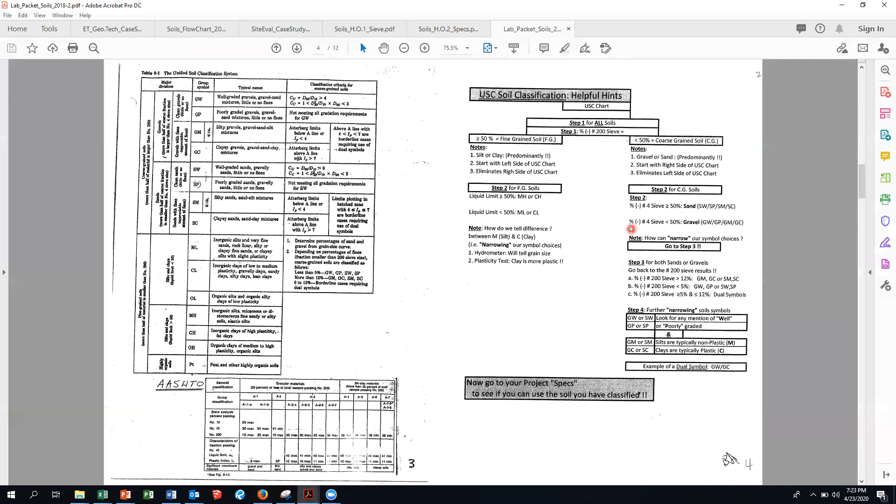All the way down. Now the pan is the last thing in the stack of sieves. It's not a sieve. It literally catches the silts and clays. So, whoops. There, didn't know what that was. So you're going to weigh each of those sieves, right? And then you're going to have a sample size, say 1,000 grams.

Did I lose all my other, no. And so you're going to take that sample and you're going to pour it into the sieves, and they're in descending sizes. You pour that in, and then you put it in a shaker, which you've seen if you watch the video. And then you take it out of the shaker, and then you're going to weigh it, but now it's got soil in it.

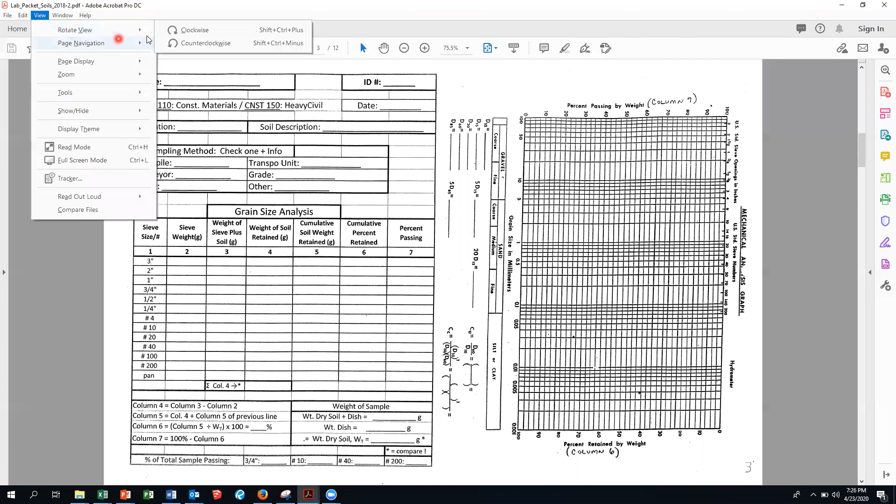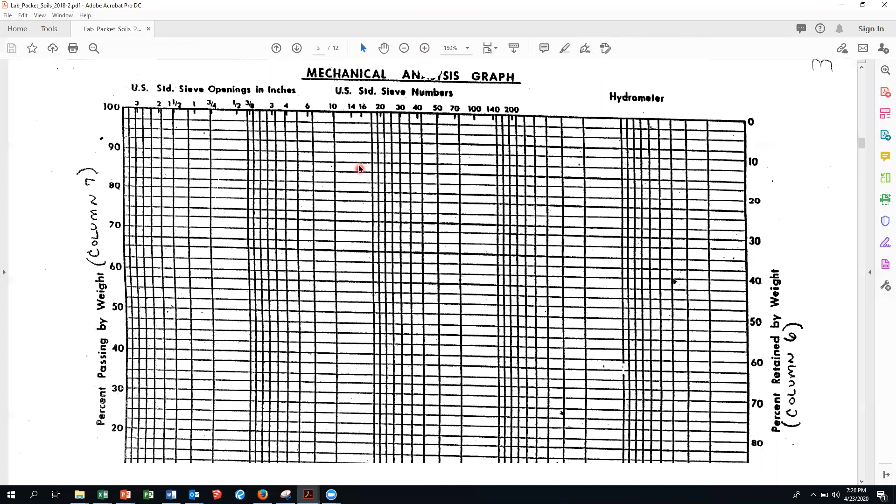If you take a look at this graph, this is at 90 degrees. So now there's the percent passing, that's column 7 from your data sheet, and here's your grain size. Put this down here. So this is a logarithmic curve, right? So these are the grain size in millimeters, and these are the sieve openings and the sieve numbers. So there's that number 4 sieve we talked about. There's the number 200. There's the 3-inch sieve, okay?

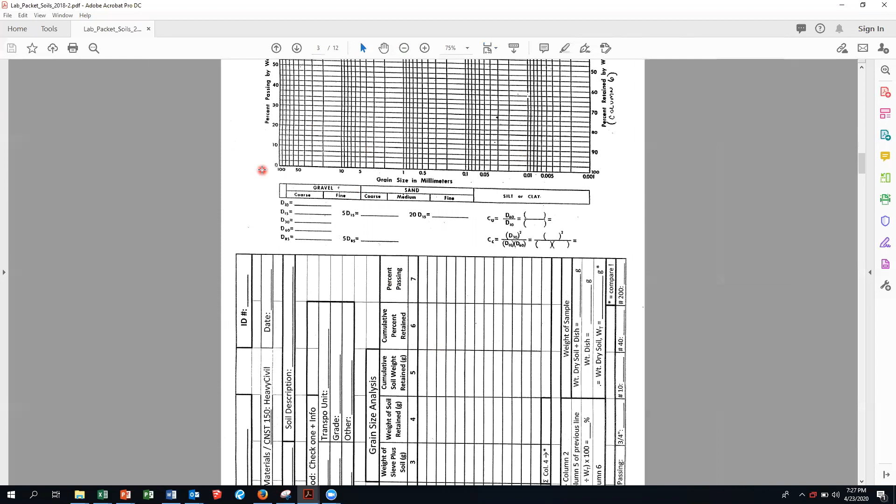And 1 inch is about 25.4 millimeters, okay? So there's 10, 20, 30, 40, 50, and it's logarithmic, so it's not an even increment along here. So you're going to take this data from here, and then you're going to graph it. And once you do that, that's going to tell you,

You got to go back to viewing it the right way. Let's see, was there another? Where's soil?

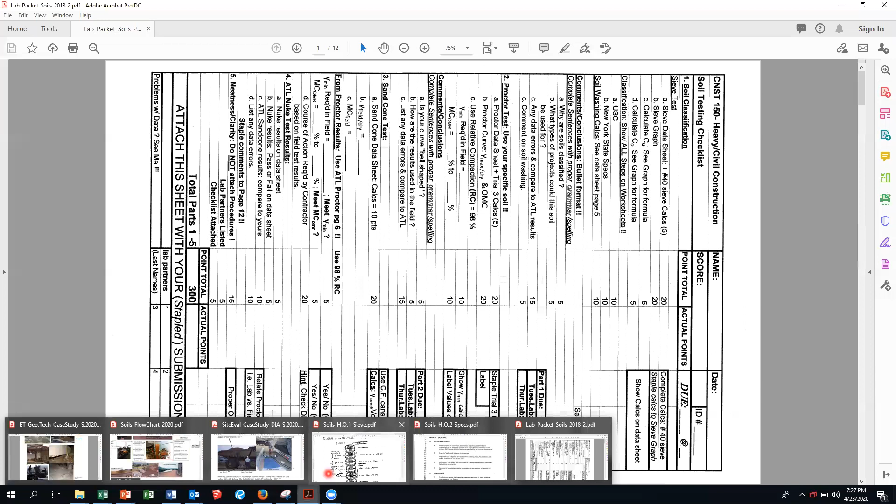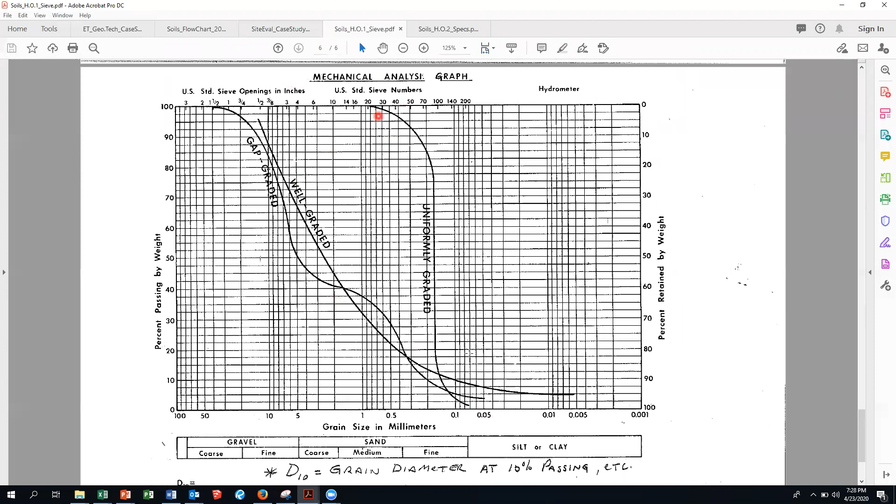Yeah, so if you take a look at this one, this is on soil handout number 1. And that's what they call the soil curve. Okay, so these curves right here are what you read about right here. So there was your sieve size, and this is actually a mirror image. They're going from their biggest sieve right to left. Our graph is left to right.

Okay, so you want to read this again. Just read pages 1 through, say, 8. And that's going to help you. 1 through 8 is on classification. It's going to give you a good description as to why we're classifying soils. Okay.

So we've thrown a lot of information at you. It is frustrating that we can't do this in the lab, because then I've got this stuff right in front of you. I pass it around so that you can see this stuff. It makes a lot more sense, and that's what I'm going to try to do with the PowerPoint. Okay. Now, so I'll make a list of all the reading that you got to do. It's not a lot. Again, page 1 through 8 talks about classification.

Okay, talks about the sieve. There's the sieve shaker. Shakes the living bejesus out of that thing. And so all the particles start to fall until they hit a sieve that has a mesh that is, say, smaller than the particle size. So the particle can't go any further down the stack of sieves. Again, if you have clay, you really can't use this. You've got to go with a hydrometer or the plastic and liquid limit.

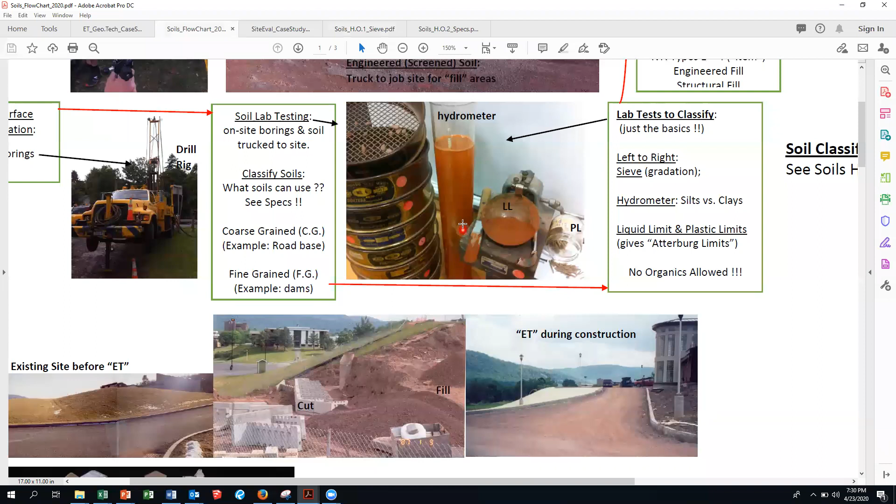Now, the plastic limit, real quick, let me find that here. This is the plastic limit. Actually, this is the liquid limit. This is the plastic. All that is the water content for the liquid limit that makes the soil move like lava. Okay? Makes it move like lava. And let's see, the mudslide.

So this is a 37-second clip. So that is a mudslide in Norway in the 70s. The marine clay hit a certain moisture level, and somebody started excavating in that area, and that's what happened. Isn't that amazing? Unfortunately, one person died, but you would think a lot more would have. And that's liquid limit. That's the moisture content at which soil moves like lava. And there was also a much longer YouTube on that.

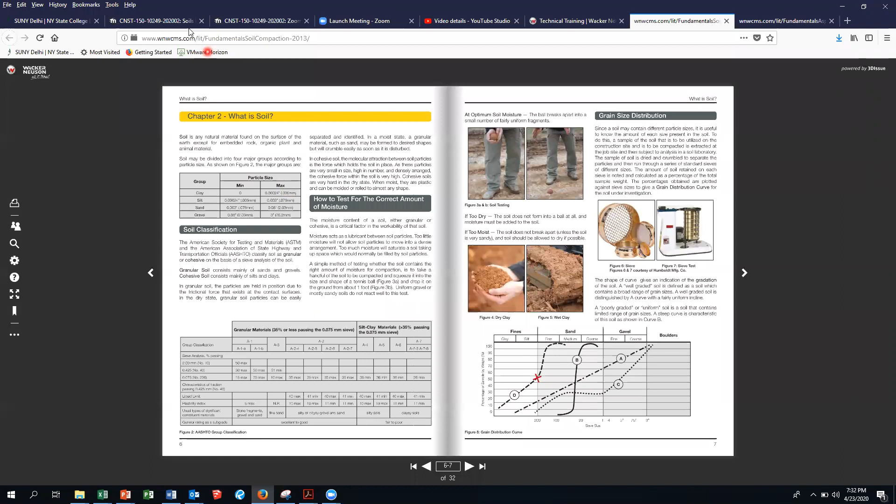Okay. And what else did I tell you? I think that was about it. Oh, I put easy questions just to make it easy. I put some questions on the column lines of the ET mockup in Smith Lab 10. Remember column line 2, column line F, column line D.4, column line G. There's some identification of those column lines. That's a gimme. It snowed the other day, made me feel like Christmas and Santa Claus, so I figured I'd throw some easy questions on there. So that's the only thing that is not masonry, okay? So just pass the word. ET column lines.

Surveying exam, Monday night, starting at, again, 7. We'll go 7 to 11 with a 2-hour block. I will be sending out an email about that probably by tomorrow. So now I'm just going through my list, and so I'm going to pause recording.